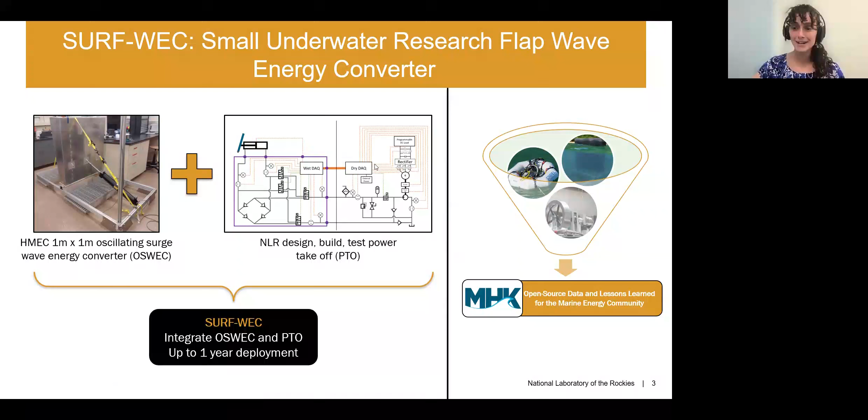And the whole idea here, if you look at the right side of my screen, some of you might recognize the HERO-WEC and the Pioneer Array, which are 2 other wave energy converters. And so the SURF-WEC is in there, in that funnel too, of just collecting open source data and lessons learned for the wider marine energy community. And so this presentation's sharing some of those lessons learned that we've collected so far.

So you might be asking why we're deploying a small scale WEC. I mentioned the flap is only 1 meter by 1 meter, 3 feet by 3 feet. This is really small when we think about wave energy. So if you think of technology on a staircase, as you walk up the stairs, your risk, your cost, your time are all increasing. On the bottom of the stairs for a WEC, we have modeling. There's a lot of modeling done on different archetypes of wave energy converters. The flap, or the OSWEC type, generally performs really well in theoretical modeling.

As you climb further up the stairs, you have a kilowatt scale deployment. And a flap type device was deployed. It was a 12 meter by 18 meter, hundreds of kilowatt scale, deployed by Aquamarine. This is the Oyster device.

And the deployment didn't last very long. And this is a common story we hear throughout industry of like, we need to deploy something large enough that is relevant to producing power. Industry needs to do that so that it's economically feasible. But we don't always have the lessons that we need to know to be able to deploy at that scale.

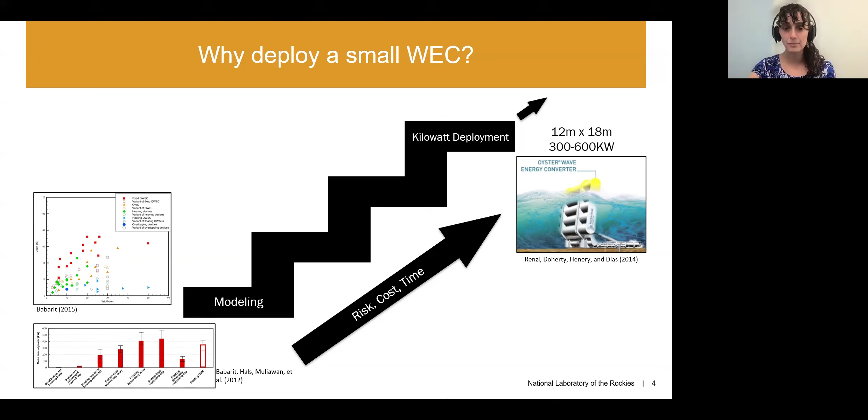And so instead of jumping a bunch of stairs, what we want to do is just take a baby step up these stairs and do a watt level deployment. So the device, the SURF-WEC, currently is at an average power of like 1.5 watts. It's very, very small power. We aren't thinking about commercialization in any sense of the word, but we really just want to learn lessons that are applicable to those larger scale deployments, to those deployments that are higher up the staircase.

So we're looking at less than 100 feet from the pier. We're looking at a water depth that's about 3 to 5 feet deep. And all of our components, when we bundled them for deployment, the bundles were each less than 1,000 pounds. And this made deployment a lot simpler and a lot lower cost. And so we can learn lessons at a lower cost, lower time, and lower risk because we're not as high up on that staircase. So this project was guided by 3 goals.

The first one is deployment. That kind of goes back to that staircase. Learn what is required for deployment, operation and maintenance, and retrieval of a small-scale flap device. The second one was looking at a PTO, and I'll dive a little bit more into the PTO that we're using, our power takeoff, but just providing more data for the wider community for tuning simulations, for designing PTOs, that sort of thing. And then finally, and most importantly, is reporting.

Just sharing all of our work is open source. Sharing that data, sharing the lessons learned, so that we as a community can walk up the staircase together. And this is our first lesson learned. This is a practice worth repeating of knowing your goals. Having these 3 very clear goals reduced scope creep on our end. And when we're at critical crossroads, we use these 3 goals to help us answer questions.

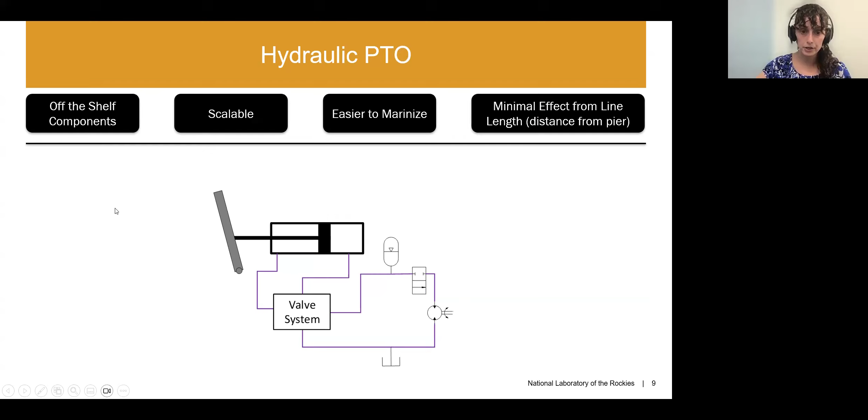But basically, we're pressurizing oil. We're pushing this oil from the hydraulic cylinder into an accumulator. And then once the accumulator reaches 190 psi, so we're working at really low pressures, an on-off valve opens, allowing that pressurized oil to then turn a hydraulic motor, which is connected to an electric generator. Once the accumulator drops from 190 psi back to 150 psi, the on-off valve closes and we start pressurizing the accumulator. And so we're taking the pulsing wave motion into a higher frequency electric generation. And then once the oil goes through the hydraulic motor, it'll then go back into a reservoir and the process can start all over again.

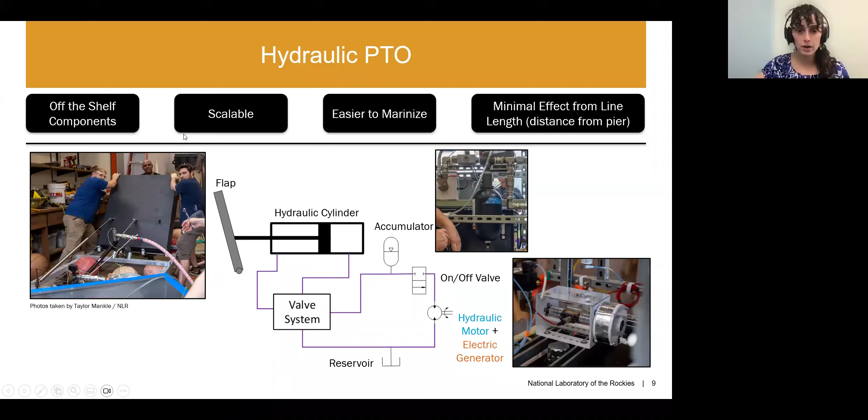So I mentioned that valving system. There are 2 different valving systems sitting inside that box. The first one is a passive valving system. This is like a rectifying circuit. So it has 4 check valves, and no matter the direction the flap is moving, energy or flow is always being pulled from the reservoir and pushed into the accumulator. And so you can see the 2 different directions the flap moves. The flow is always in the same direction.

Contrary to that, we have the active valving system where energy can actually be put into the flap. So the idea here is you can pull from that high pressure accumulator and push the flap instead of just having the flap push the cylinder. And this theoretically allows the system to be closer to resonance. So short-term loss for long-term gain. And the way this is done is using 2 solenoid valves. And so the connection between the hydraulic cylinder and the accumulator and the reservoir are independent of flow direction.

And so a couple of lessons learned. Theoretical ideas and practical systems don't always align. We had this design and we took a lot of time bench testing it to get it to work. So increasing time and budget for unexpected experiences is critical. And then also clearly defining what you're using your model for. Thinking about how accurate you require your model to be, but also how scalable you require your model to be. Thinking about, do I want to be able to easily change this accumulator volume if I scale up, for example? So knowing that going in can make your model more useful to you later on.

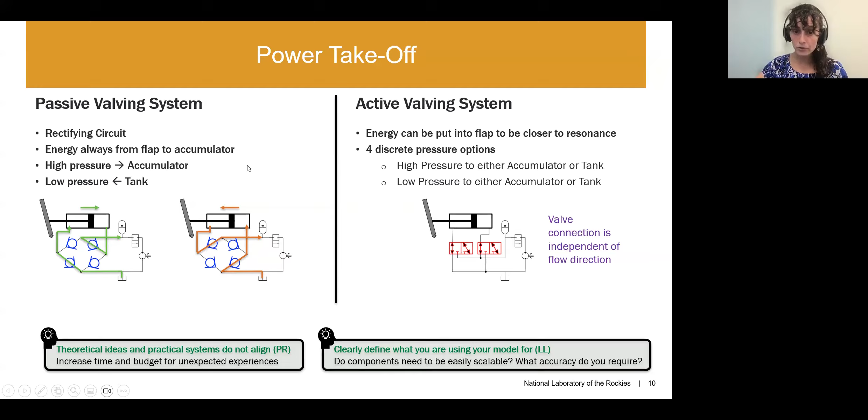Once we had our design, we got into testing. So we started with component and subcomponent testing, and this was critical for our success. Even though it's adding more time in the front end, it saves time overall. Understanding each individual component and any subcomponents actually changed our full system design a little bit. And so this made our overall testing much shorter.

Once we had that component and subcomponent testing done, we went into the full system test. You'll notice that this black piece in the bottom right corner is an electric linear actuator. This is what we used instead of our flap for lab testing that was out of water for characterizing our system and making sure our system worked. On the table here is that valving system. So that has both the active valving and the passive valving, along with the valve selection.

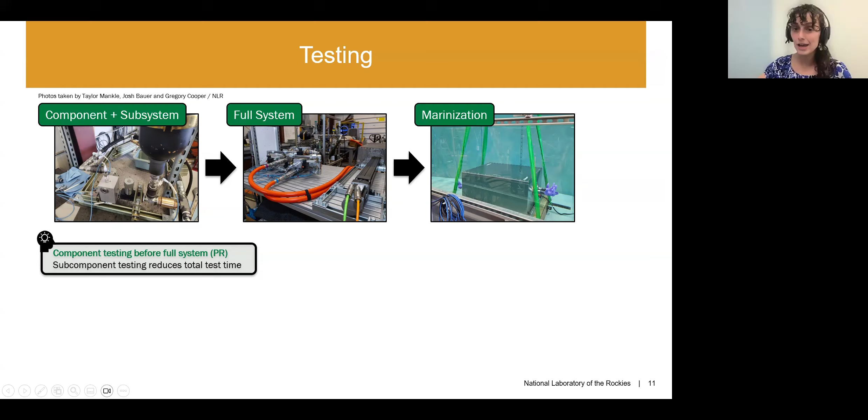So we did a lot of full system testing, and then we marinized the equipment. So this valving system was all put into this enclosure here because it sits underwater, but all of our electronics were also marinized. Even the components that sit on the shore were also prepped for pier weather. And once we marinized, we went back to full system testing again.

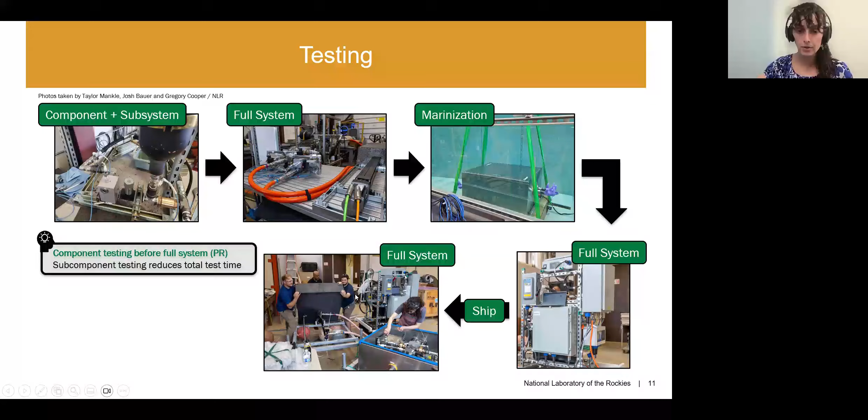And then we shipped the system. And again, we tested the full system. This is when we integrated the flap with the PTO. This was the first time connecting the HMEC equipment with the NLR equipment. So we were testing that before deploying in the ocean.

A couple of notes here. You'll notice that we tested the full system 3 different times. Test it as much as you can. Each of these times we learned new things. Each of these times we had to slightly change things. We had to fix things. If it doesn't work in the lab, it's not going to work at sea, and it's much easier to fix in the lab.

And then prioritize function over performance. I think in marine energy, a lot of times we get lost in performance characterization without the focus on does it work and is it going to work for a week? Is it going to work for 2 weeks? Is it going to work for a month? So just really prioritizing function.

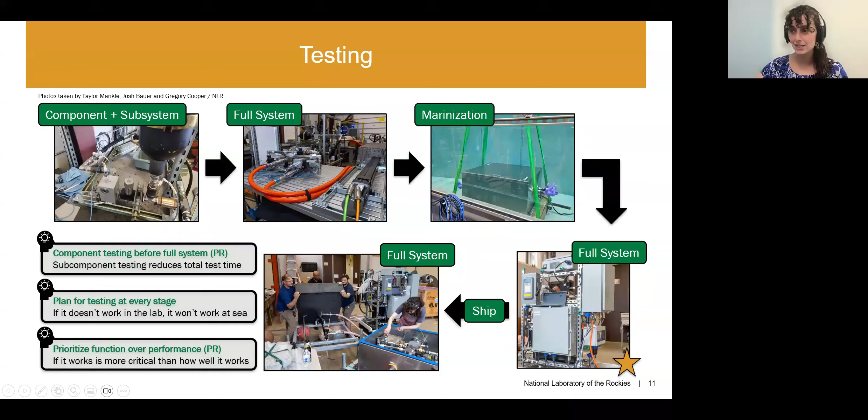I want to take a note and dive into this full system testing after marinization where we learned some lessons. So after marinizing, we had some expectations. We expected the system will perform as it did pre-marinization. We just unplugged things and plugged them back in a box. It should be a simple test. We expected little time required.

In reality, the system initially didn't work. The first issue we found was that there was a bunch of air in that valving system that we had introduced during marinization, and we were really struggling to get it out. And so we tracked air bubbles. And a lesson learned here was design for easy flushing and purging of hydraulics.

What we ended up doing was adding these bleeder ports throughout the system because a lot of our hydraulics were horizontal runs. And so it was quite difficult to get air out of the system, and air is no good in a hydraulic system. So design for that initially.

As we were tracking this air bubble issue, we didn't really look at the rest of the system. We saw the issue and we dove into it. And this was another lesson learned. We should have taken a note here of, okay, we need to fix the air bubble issue, but let's also dive into, is everything else working?

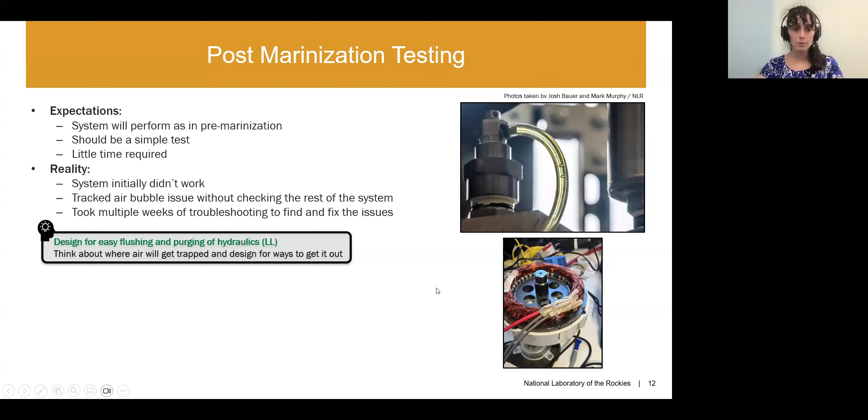We found that our generator and our torque sensor had both stopped working. And so it pushed back our timeline having to fix these independently rather than fixing them at the same time, or starting to look into them at the same time. So evaluate the whole system before focusing on individual issues when you can.

This took multiple weeks of troubleshooting, and one of the reasons we were doing this testing is because we wanted to test our procedures before deployment. And so this was critical. We had oil flushing and air purging procedures written out, and these got entirely changed based off of what we learned during this testing before we shipped the equipment. This actually made us switch to shipping the equipment filled with oil, and so our dry commissioning was a lot smoother.

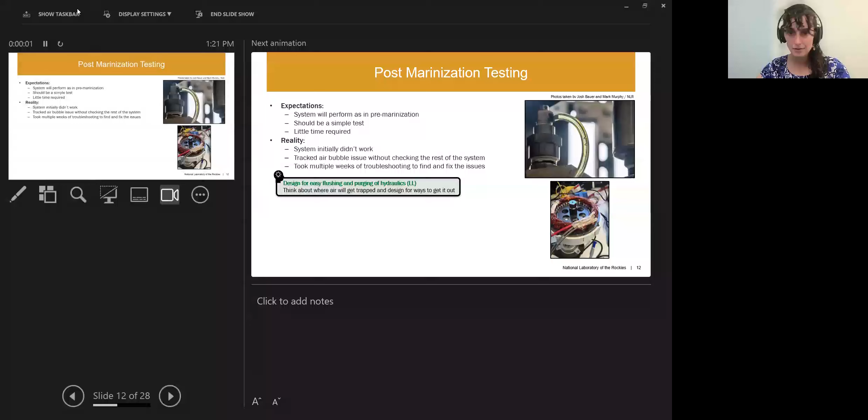So here we did a really good job emphasizing how these different components would fit together. Even though the flap and the PTO had never been in the same room until dry commissioning, the two teams worked together and talked through every connection point, making sure that all of our measurements were the same and that we were on the same page. We also scripted out very detailed procedures, so everyone was on the same page prior to deployment.

And in that same vein, in-water personnel was a part of setting up the system prior to deployment. A lot of times your divers are going to be different personnel than the people who have been testing the equipment or designing the equipment. Everything is harder in the ocean, everything is harder underwater. And so having them set up the equipment, know how it's set up, know how it needs to be unraveled for the hosing, and doing that in the lab was critical to making it smooth in the ocean.

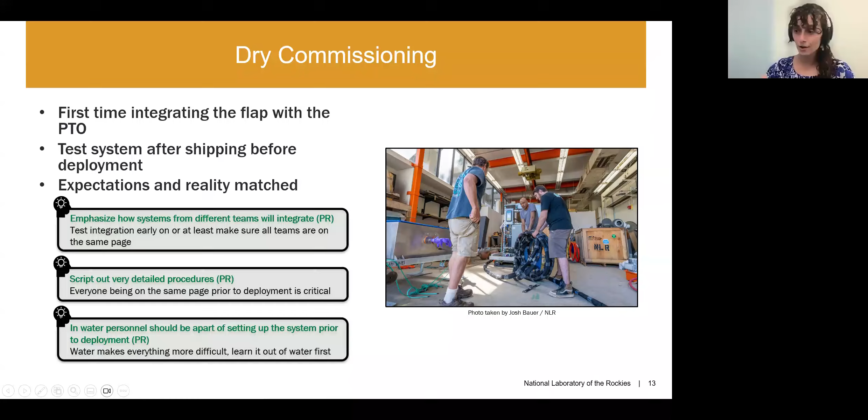Once we finished dry commissioning, we thought we were ready for deployment, but we had a weather event come up.

In the planning, we were told by local team members, let's have a 3-day weather contingency. We will never need it, though. If you think of Hawaii weather, you expect a clear, calm day. In reality, Oahu experienced a historic storm, and the entire weather window was required. The pier was actually shut down for high winds, so we weren't allowed on the pier. And so we're really thankful we had that weather window.

So even if you expect to never use it, include a weather contingency. It's always better to finish early and not use a contingency than not have a contingency at all. Trusting the weather judgment of local team members: as we saw the storm coming, they were able to advise us on the severity of the storm and what that would look like in the ocean. They know the location best.

And then prepare your equipment. Once you are deployed, prepare your equipment for the worst weather immediately. Don't say you're going to do it next week. A weather forecast might be wrong.

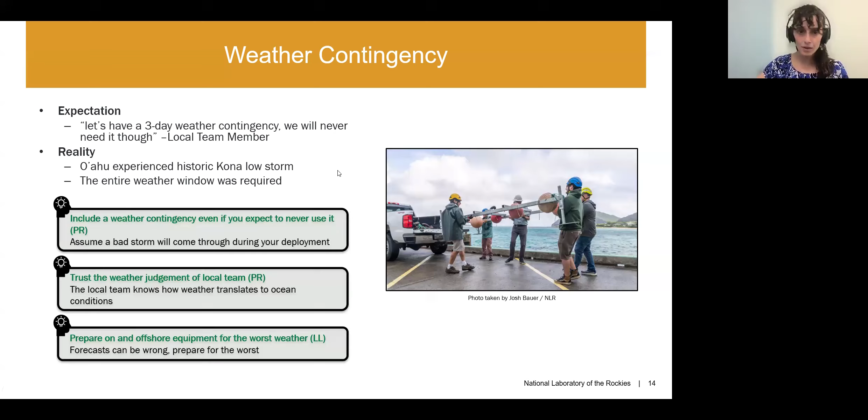Once we got through the Kona low storm, we did deploy. We deployed in sections with a forklift, which you can see in the bottom right is our valving system and our hoses being deployed. For deployment, we had 2 divers and 2 to 3 swimmers. And the system was stable immediately after deployment, which is a huge, huge win. Here, expectations and reality really, really matched.

And we think that we had one clear deployment lead, and we held daily plan of the day meetings, and both of these really led to our success. These ensured that the entire team was on the same page, and for any major decisions, one person knew about them all, and so we weren't making contradictory decisions.

When you are designing a system, don't just think about the longevity in the ocean, don't just think about power performance, but also think about those deployment activities. Those a lot of times can be the highest load or highest impact activities on your device. And so design for those and however long you want your device to last in the ocean.

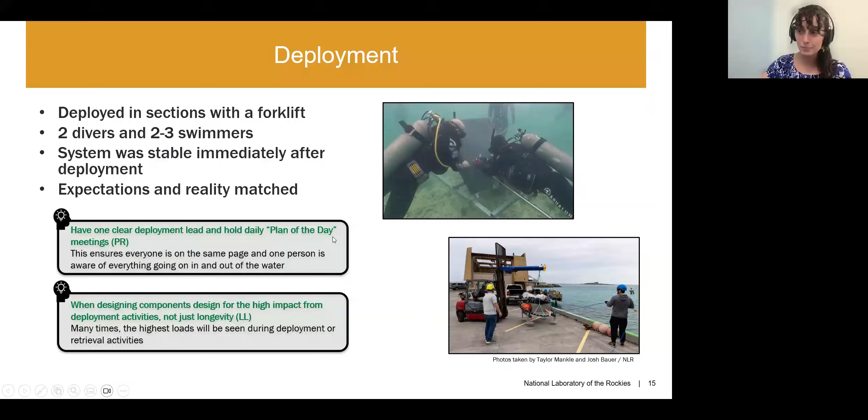During deployment, our most complex piece to deploy was probably the flap itself. Our flap has a port for purging it of water, but also filling it with water so we could make it less buoyant. Our flap has over 500 pounds of buoyancy, so it's hard to sink into the ocean. So our team had done testing to fill the flap with water so it would become more neutrally buoyant, and they expected it to take about 6 minutes. And we expected that the flap would be easy to maneuver once fully flooded.

In reality, time in the water feels different than in the lab. We did not time how long the flap was filling with water before the team was like, all right, that's long enough, let's get to deploying. When you're standing in the water or swimming in the water, time feels longer. You don't want to just be floating around. So the flap was slightly buoyant through all of deployment, and this caused difficulty in aligning the flap with the flap anchor.

So one of the thoughts here was choose your tide intentionally, because the flap was buoyant throughout all of deployment. If we were deploying during low tide, the flap would have been sticking out. The top of the flap is surface piercing, so we would have needed less water in the flap for it to be buoyant.

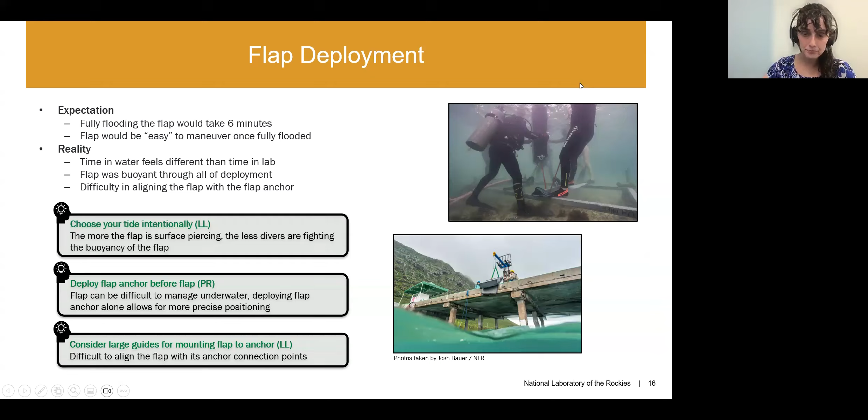So something we've learned here or are considering in future is testing components with a magnet or testing them in salt water. This hadn't really been thought about before. We don't expect this to be a common issue, but it's something to think about.

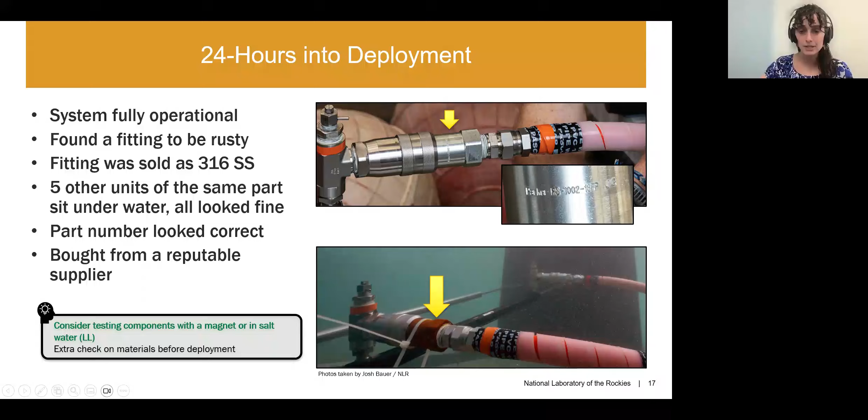But a day into deployment, the pier lost power, and our MODAC system is powered from pier power. And our MODAC system thankfully automatically restarts after a failure. And so even though we didn't collect data while the power was out, the MODAC system automatically restarted. And so we were alerted with a text message during that restart, so we knew that the system had restarted, and we could check up on it from Colorado to make sure it was operating properly.

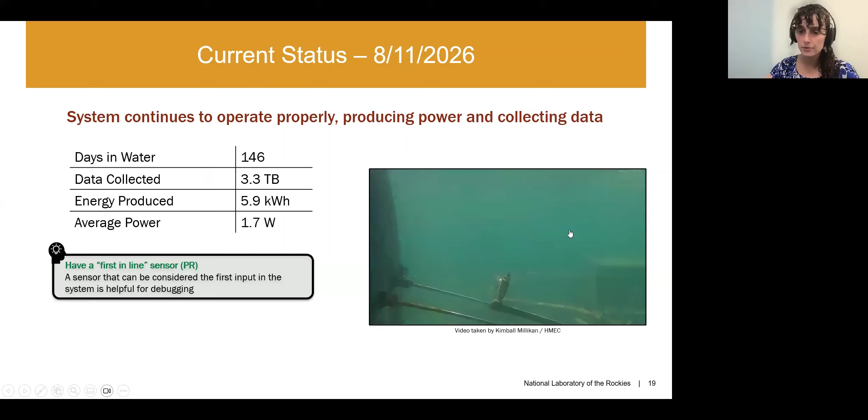So here we have a first in line sensor. This is our position sensor. You can see it sitting next to the hydraulic cylinder. So this right here is the position sensor. This has been super helpful for understanding if there's an issue with our system.

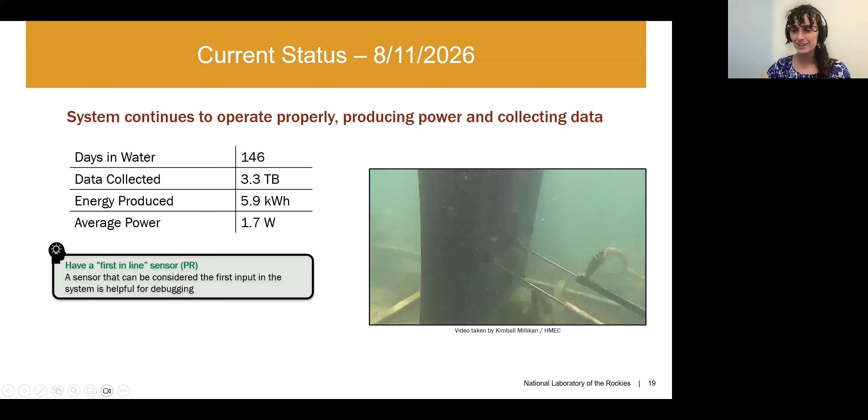So we know how much the flap is moving or how much the hydraulic cylinder is moving from this position sensor. And so we can use that to see if we're getting the power we expect from the bench testing data. And so no matter what the wave condition is, we can then just look at our first in line sensor and have a really good understanding of if we have a leak or if there's an issue with our system. And then testing fail-safe conditions.

I mentioned this with MODAC 2.0, where MODAC 2.0 does restart, but we do have an issue with our programmable DC load, where all of our electricity is just being dissipated through a programmable DC load, and this does not automatically restart. And so whenever we lose pier power, somebody has to go to the pier and restart that system before we're actually creating electricity. We're still collecting data before they do that, though.

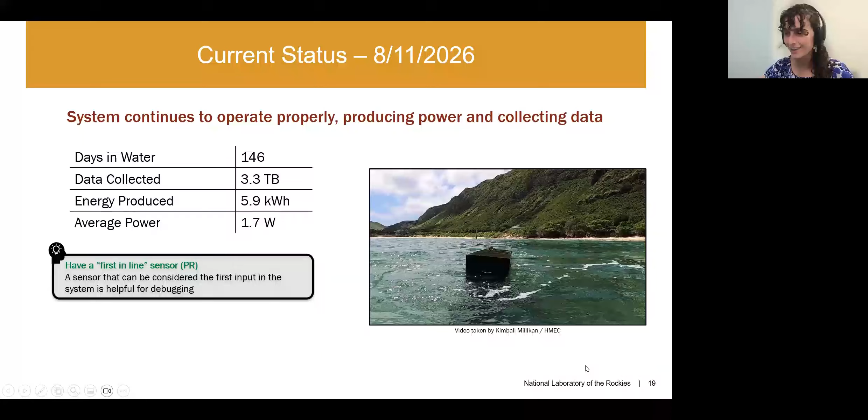Did biofouling reach an extent that it became a problem? And would you use any anti-biofouling coats if you did this again? So the flap is painted in an anti-fouling coating. And so if I go back to that video, you'll see that the flap itself really doesn't have much biofouling on it. The biofouling we've seen so far has not been an issue.

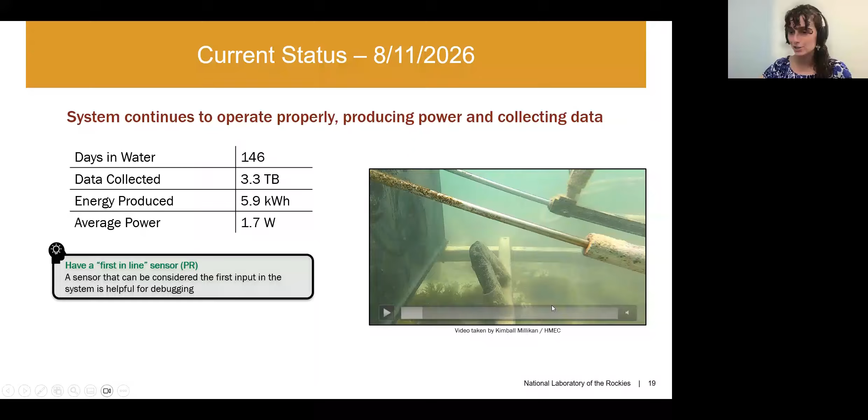You can see here that the hydraulic cylinder and the position sensor, because they're moving, they're keeping the portions that they're moving pretty clean. So we haven't had an issue there. The spotter buoys we have had, and I think this is common with spotter buoys where you just maintain them and wipe them down occasionally, to keep their wave characterization a little bit more accurate. But we used anti-fouling paint on the flap, and otherwise for the PTO itself, we haven't really been concerned about it.

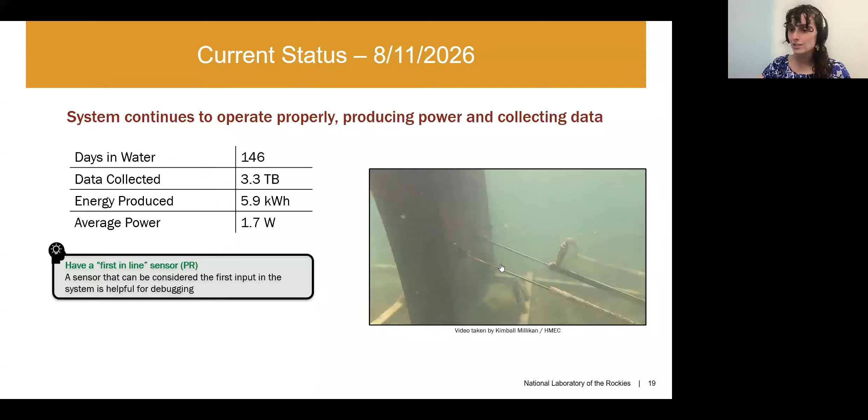These are all great questions. Did we see any wildlife interaction with the flap? I have seen a couple of videos of fish swimming around the flap. PNNL, the Pacific Northwest National Lab, actually set up this video feed. And so we have some live feed and they're doing some environmental monitoring. They have hydrophones in the water to look for sound, or at least they deployed that for a day. I'm not sure if that's deployed long term.

And then they have some video where especially at night, because of the spectrum of the camera they're using, they're able to see wildlife interaction. So they've been looking into that a lot more. Thanks, Andrea. Yeah, at least one monk seal, sea turtles, and fish.

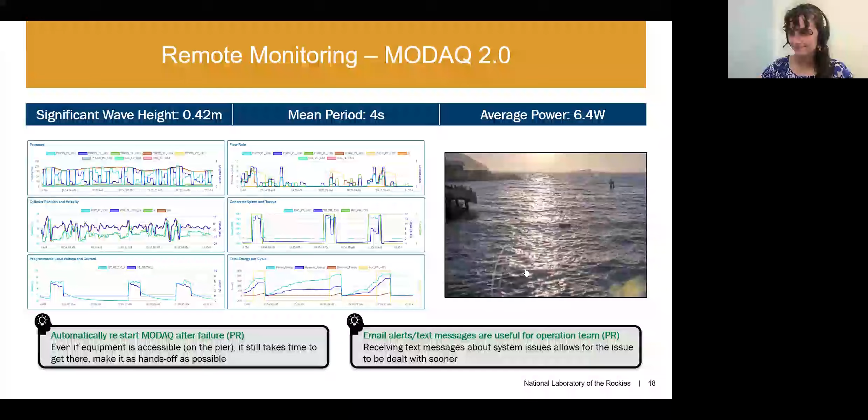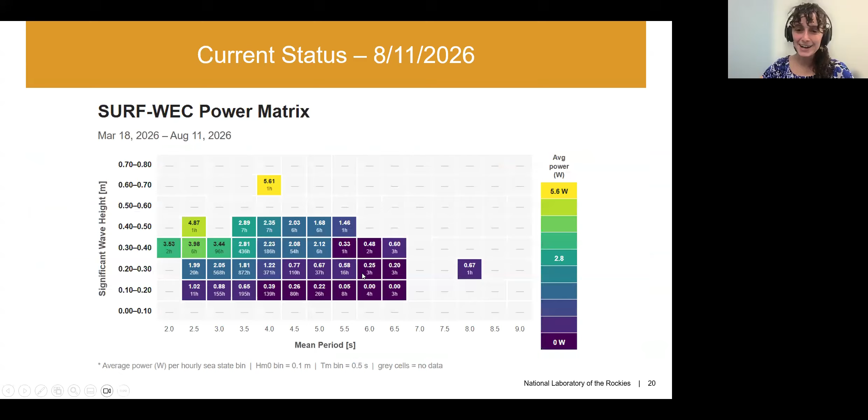Would real-time current measurements be helpful? I think the team that's been checking the system and diving, I'm not a diver, have been feeling current, and so having a current measurement would be helpful. Just more learnings there. So yeah, thanks, Joe. Yeah, the hydrophones were just for the day.